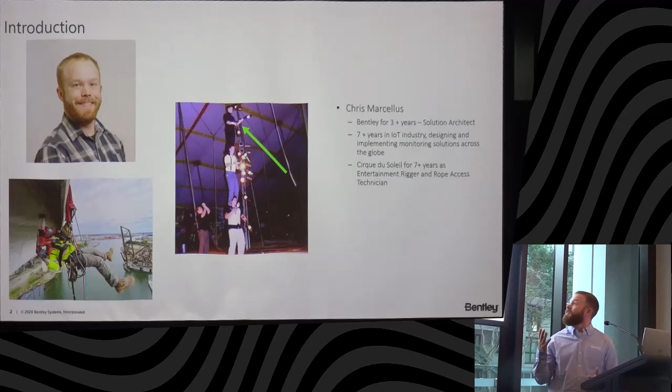So first slide is going to be my introduction slide. This is kind of my highlight slide to make me memorable.

I've been working with Bentley for about 3.5 years now. Previous to Bentley, I was with the monitoring group in the IoT realm, SenseMetrics, if anybody's familiar with them, and I transitioned to Bentley as part of that acquisition. So I've been a solution architect with Bentley for the past 3 years. Prior to that, I was an installation technician for a company called BDI.

I'm here, as you can tell by my very American accent, from Denver, Colorado. I've been here since Tuesday, flown in to present at this event. So I'm grateful to be here and for the opportunity to speak to everybody.

But I've been in the IoT monitoring industry, designing telemetry systems, doing rope access, and really a boots on the ground experience that's transitioned more into the software side of the equation since the Bentley acquisition. But with the benefit of having that hardware background and being able to consult our users in the industry.

And previous to that, how I wound up in this crazy world that I'm in, I worked at Cirque du Soleil for 7 years. I was an entertainment rigger at Cirque du Soleil and learned rope access, learned the ropes, no pun intended, and transitioned from a rope access technician at Cirque du Soleil to a rope access technician traveling the country and the world installing these sensor types. So hopefully that makes me somewhat memorable going forward as we leave here today.

So a few things I want to talk about. First is going to be iTwin IoT and the mining industry.

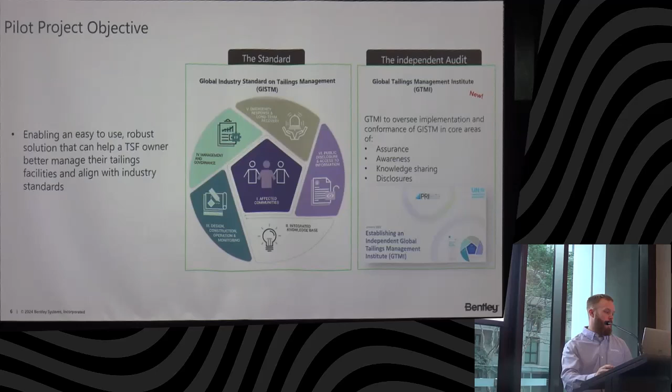So the pilot project objective: enabling an easy-to-use, robust solution that can help a TSF owner better manage their tailings facilities and align with the new industry standards, being able to be up to par with the industry standards as they evolve.

The why: structural integrity of tailings storage facilities are critical to community, safety, and environmental protection, so zero harm to humans is a very important thing. The challenge was how to go from a reactive workflow to a proactive workflow, using that plethora of data to visualize it in one single source of truth, and have access to reliable information when it's needed at the tip of your fingers, instead of relying on outdated, inefficient workflows that bog things down.

So the project approach: we instrumented 3 different control sections. We have some Worldsensing individuals here. We used 3 threads - the thread was a SenseMetrics hardware data logger that is now a Worldsensing hardware device, but it was used as a gateway in the network.

And then we used 14 strands of vibrating wires to tap into 38 piezometers to get pressure data, elevation to water, depth to water, and have live IoT data streaming in, as well as a digital twin from Leapfrog and some geotechnical analysis from GeoStudio. We were able to utilize the mobile app and bring in that data in real time, confirming in the field that a sensor was coming in as expected.

So parts of the workflow that weren't included: there were a few control sections that weren't instrumented, but there are plans to instrument them in the future. And we didn't include as part of the pilot InSAR, drone data, earthquake data, or geophysics.

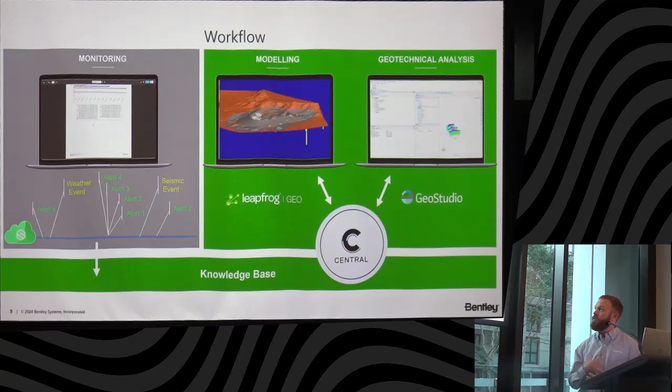So that's what I wanted to talk about with the pilot project. It was a successful pilot project, and I would say that there is stuff on the roadmap from that pilot to automate that workflow even more, which I look forward to seeing evolve in the future.

But the next few slides, I want to go over the iTwin IoT real-time monitoring and what our capabilities currently are in that realm. So IoT asset condition monitoring - you always want to start with the sensor data acquisition.

How do we get your sensor data in? Within Bentley, we are strictly on the software side, so we have to tap into different hardware manufacturers and their sensors, but we do have an IoT sensor agnostic approach. We want to be able to get all your data from your different hardware into one roof, so you're not relying on dozens of different logins for dozens of different sensors. We want to be able to be that one source of all your IoT monitoring data.

Once we've tapped into that sensor data acquisition, we can visualize and analyze using different modules within the platform. So we have dashboarding ability, data graphing, we can do anemometers and wind rose plots, XY plotting with your inclinometers and your slope stability. And then once we have all that information in, we work on the collaborating and the reporting and the alarming and the things that make sure you're notified as soon as you need to be, as soon as any thresholds that you've set have been breached.

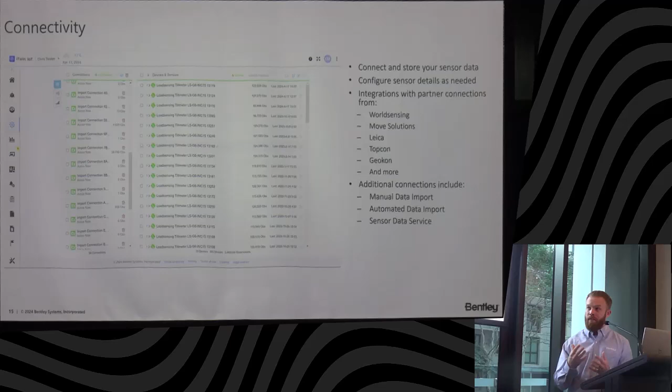Here's just an example of our connectivity module. This is going to be that repository of the sensor data that comes in. You have your observation counts, your last observation that came in. You can visualize alerted sensors directly on this platform. Every sensor will have a configuration page where you can add notes, calibration factors, installation photos, and latitude and longitude location to be able to visualize where the sensor is in real time within the different modules that we have.

Our dashboard module allows you to bring in your project data, your IoT sensor data, as well as visual data such as photos and alert summaries, different things like that into the platform.

So within every project, you can have customized roles to pick and choose who is able to do what. And then you can set any profile, be it a dashboard, an alert, a report, whatever it may be, as either private, restricted, or project-wide, to make sure that stakeholders are getting informed in time as needed. And maybe, especially with things like an alert threshold, maybe you want to make sure you're going to verify it before somebody else who might not be as involved in the project gets alerted and kind of rings a panic alarm. So we have different abilities to be able to customize individual profiles to that extent.

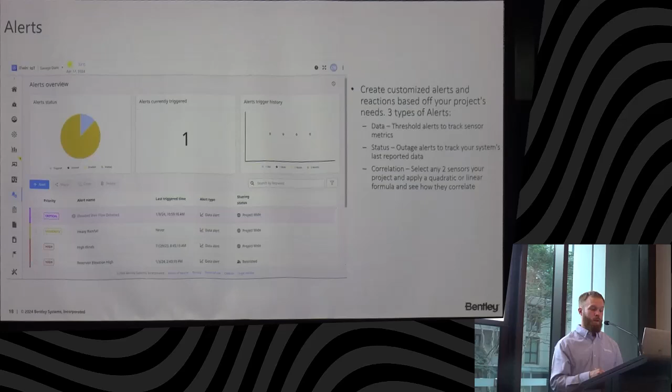So this is going to be an example of an alert that's currently in a triggered state. If I roll through, you can see a trigger history, what value triggered the alert and when it happened. You can also see a data graph display in comparison to when the sensor values compare to the alert threshold that you've set. And then we do have different priorities that you can set between low and critical, and the color scheme will change depending on the criticality that you set. And then we do have the ability to do alert trigger actions, utilizing that IoT functionality.

Maybe you have a solar system set up and you have a sensor that's in low power because it just doesn't have the demand to be on all the time. You can change that sensor connection power mode automatically in response to an alert trigger.

We can also change the sensor sampling rate to get more data coming in. We can take a photo in response to an alert trigger, toggle a relay device such as ringing a siren on site, and we can also generate a report automatically in response to an alert triggering.

We also have our issue resolution module. You can create an issue in response to an alert triggering, and what the issue resolution module does is allow you to take it a step further. Your alert triggers, and you can create a work order in response to it.

It will automatically populate the sensor data, the length of the sensor data, the values and the dates that trigger the sensor data, and you can assign a task to anybody on site in response to that alert triggering. It will be kept on the platform and can be exported to CSV so you can stay organized, keeping everything under one roof as much as we can.

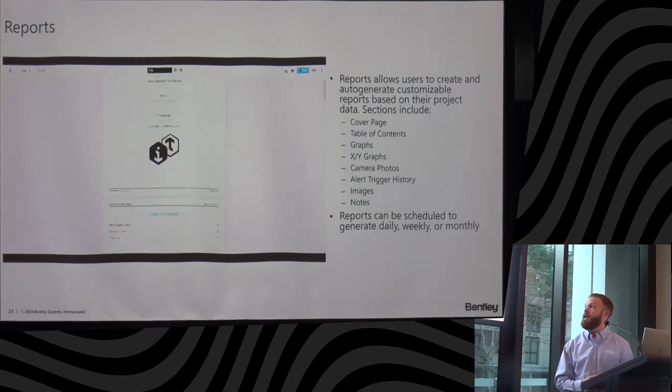We can also add tabular data to this view, alert summaries—use this to really keep track and keep everybody informed on site to what's happening.

And then last but not least, we do have our digital twin workflow. The digital twin module allows you to overview that sensor data. If I click onto the next slide, I'll go through about a minute and a half here.

That red icon is an example of a sensor that's in a triggered state. As I mentioned, each sensor is going to have that latitude, longitude, and elevation you can set. But if you don't have that surveyed ability, you can just snap the sensor into place directly within the module. Any sensor with a hyperlink already has a location, but you'll see with this piezometer we're able to just snap it directly where it exists, and now it's available to visualize within the module.

We can also do heat mapping by metric or by alert threshold. The heat mapping by metric allows you to choose any sensor on your project, any metric, and see how that heat map is displayed over time. We can also move the time slider, and as you scroll through it, the heat map will actually change depending on the sensor data coming in on that date.

So you can see how the structure is being impacted by things such as climate change, or maybe there was a big storm on a certain day that you're aware of, and you can visualize that way.

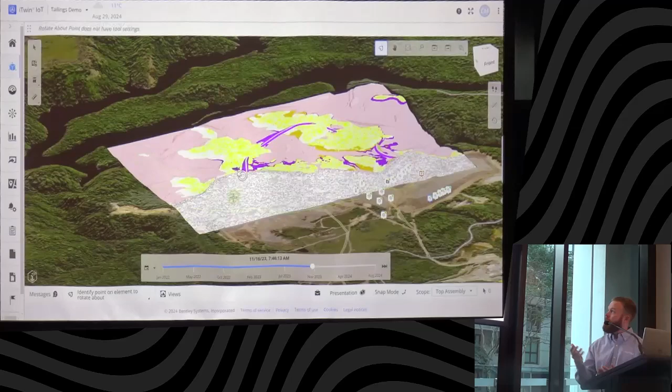We can also bring in the geological modeling over an IFC, view it in combination with that reality flight from the drone, with the sensor data, and we can also visualize the boreholes. One of the advantages of the BIM modeling and the boreholes is they come in as individual pieces. You can toggle off and on every borehole, and build different views as needed to really keep organized and make sure you're able to visualize the correct spots within the tailings to monitor over time.

Okay, some of you in the room may know about Sixense. For those of you who don't know us, I'll give a brief introduction. I'll then talk a bit about our instrumentation and monitoring solutions. We'll then look at a few different use cases, and then at the end I'll make some conclusions and recommendations.

Okay, so about Sixense Group. So, okay, the presentation on this screen is not changing, but this one is.

Sixense is offering services across 4 main business areas, from left to right: instrumentation and monitoring, this is the bulk of what we're doing here in Australia; digitisation and inspections; some geophysics and specialised engineering; and also digital solutions and software.

The common theme among these services is quality data. So our job is really to provide data that's quality controlled and actionable for our clients, whether they're constructors, mine operators, TSF operators, designers, builders, and so forth.

Globally, we've got about 20 different offices with headquarters in France, and locally that looks like this. Our headquarters are in Melbourne. We've got offices in Sydney, Adelaide, Brisbane with an asterisk because we're setting the Brisbane office up at the moment, and across the ditch in Auckland.

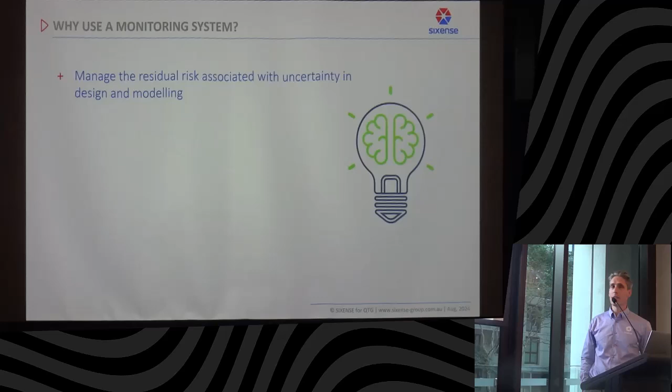This was alluded to before. When we design tailings dams or structures, we don't know everything, we make assumptions. We need to monitor to understand those uncertainties and also the residual risk in our structures.

It's also for early detection of a developing instability. Visual inspections, of course, are good. If we've got sensors deep in the ground, we can be alerted to things that are happening earlier.

It could also be for communication of an alarm exceedance. So, okay, we've got a developing situation, an alarm has been raised - do we have a structured process through the TARP or whatnot to efficiently get that message out to all the stakeholders? It can also be used to confirm the geotechnical characteristics are within the expected ranges.

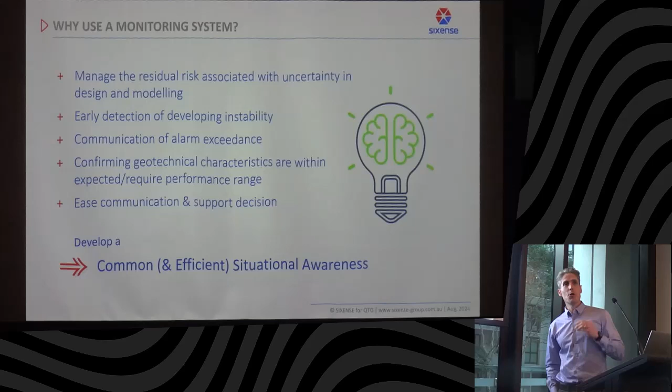And it can ease communication between different stakeholders and help support the decisions that they make. So at the end of the day, what we're looking to do here is develop a common and efficient situational awareness. All stakeholders should understand what's happening on their site, and it should be done efficiently.

Looking briefly at the situational awareness maturity model, which goes from low up to common and efficient. So low - this is a site where the data is inconsistent, we don't have all the data that we need, and the different stakeholders aren't communicating. So this is a worst case scenario.

Moving up to diverse, where we may have the data, but it's stored in different places, it's siloed, and different individuals have control of those different data types. Up to costly - okay, this is maybe where we're gathering all that data in one place, but our processes aren't optimised, and it's not efficient.

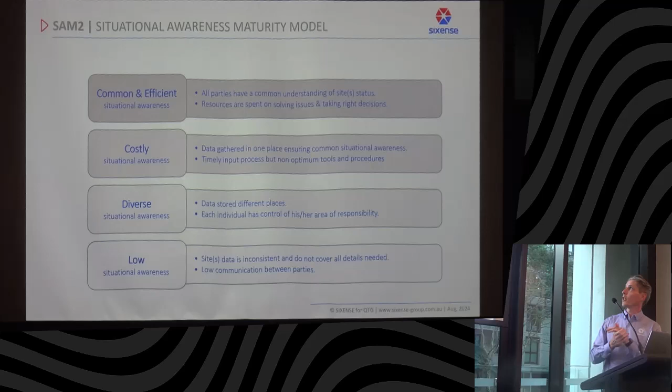And the top of the chain here, we've got the common and efficient, so all parties have a common understanding of the status on site in terms of monitoring, and resources and time are spent on solving issues, making decisions, not gathering the data. This is really the objective here. I'd say most sites are probably at diverse or costly. A few might be at common and efficient.

Okay, so how do we get there? Well, a good start, as was mentioned earlier, is to have an integrated monitoring solution where you're bringing all of that data into a single place. So whether that's your geotechnical sensors in ground, like inclinometers, extensometers, piezometers, above ground or deformation sensors, things like automated total stations or InSAR data, laser scanning, and environmental sensors - dust, noise, vibration, and so forth.

Integrating all of that data into a single place, a single point of truth, is very important. Another important thing is to have real-time data collection, which can improve efficiency.

Not so many years ago this would have been quite costly, but now it's probably costly not to do this. A lot of the sites are remote, it takes time to go around and collect sensors. It's really a no-brainer to implement an automated real-time data logging solution at your site. There's also, of course, not real-time but remote, satellite-based technologies such as InSAR, and then we've got GPS and so forth.

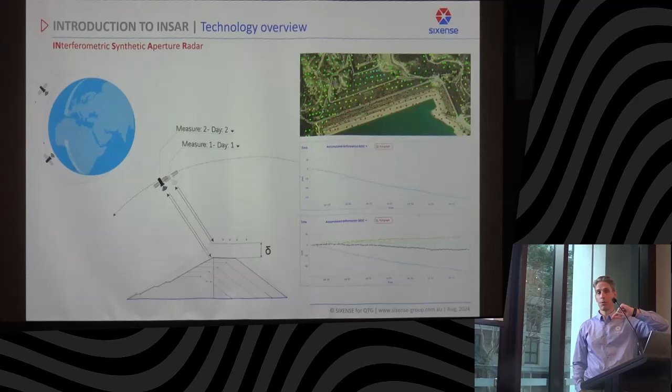Quick introduction to InSAR. I'm sure most of you are familiar with the process, but basically satellites orbiting at about 800 kilometres above the Earth's surface from north to south are constantly scanning the ground surface, and between subsequent visits you measure the phase shift and then derive the displacement. Typical medium resolution satellites shown at the top there, and we can see the displacement along that dam crest. That's about 60 mils in three years. So every time the satellite passes, you get a new point on your time series curve.

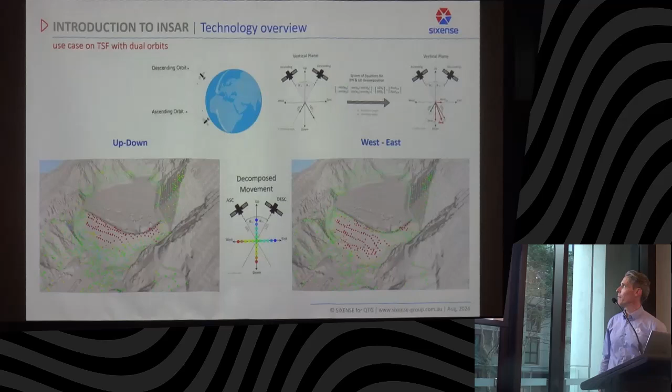Now, InSAR is mostly used in single orbit, which is line of sight displacement, but if you're interested to use InSAR for horizontal displacement and true vertical, then you need to use dual orbits. So one satellite looks this way, the other satellite looks this way, and then you can decompose the vertical and horizontal movement. An example here on a dam, whereby up-down we're getting settlement, but also east-west it's moving out, so it's sliding down. The important thing to note with InSAR, because of the orbit of the satellites, is that we can only measure east-west horizontal movement, we can't measure north-south. So the orientation of your structure is important before you decide whether to use InSAR in dual orbit.

Software, of course, is important, and I think we'll see a few softwares today. Ours is called Beyond Monitoring, and a few key features of this for raising common, efficient situational awareness include data integration, making sure you've got a platform that can integrate any type of sensor data. It should also be able to correlate data, do calculations, and give you data insights. GIS-based platforms are a good start, where you can turn layers on and off and comprehend a wide range of sensors and a lot of data easily.

Alarm management, as talked about earlier, is key. Also integrated reporting and journals, so you can make comments on your sensors and explain what's happening. Visual inspection management is also a nice bonus to have, since we know visual inspections are an important part of monitoring. And having a software provider that is certified for data security is also becoming increasingly important, so make sure your vendor has the appropriate certifications in terms of data security.

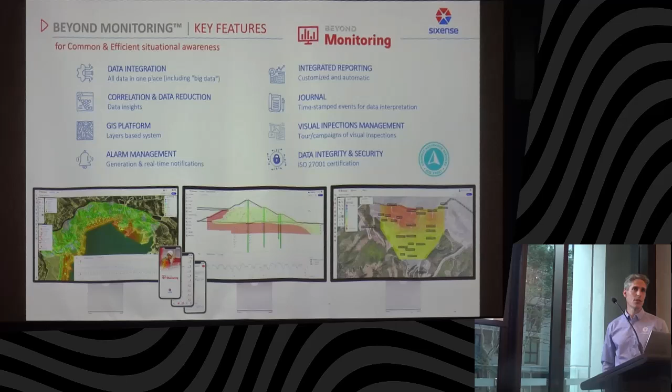We'll now look at a few use cases. I'll look at a small site, a large site, a complex site, and touch briefly on a multi-site. So this is a small TSF site, but it's state-of-the-art.

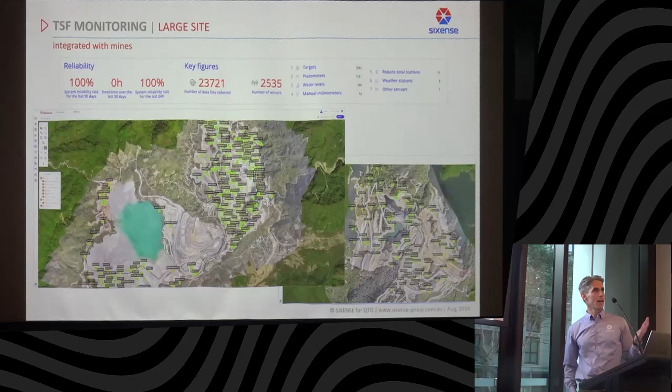Moving up to a large site, this site has about 2,500 sensors. It's 2 large TSFs adjacent to some open pit mines. There's 11 robotic total stations with about 1,300 monitoring prisms and 1,100 piezometers, some water levels, weather stations, and so forth. Having a system that is capable of integrating this volume of sensors and data is also important.

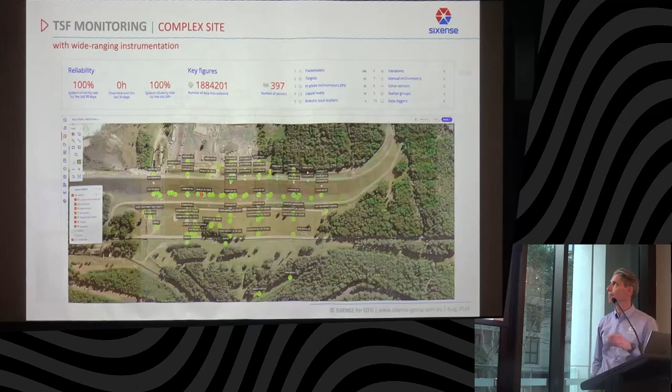And this site's a more complex site. It's got fewer sensors, about 400, but there are a lot of different types of sensors on this site. The reason being that this tailings dam is also being remediated and upgraded, so additional types of sensors are required here. There's a large network of piezometers installed, all with real-time data collection that we can follow by the hour.

There's also automated total stations, which we can control directly from the software. So there's no need to use Trimble or Leica software if you don't want it. We can drive those total stations directly from our software.

There's also other things. Of course, we're looking at water flow, but we're also looking at noise, vibration, and dust, which are not always critical for TSF. But in this case, there were communities close by to this site, so we needed to monitor those parameters during the construction.

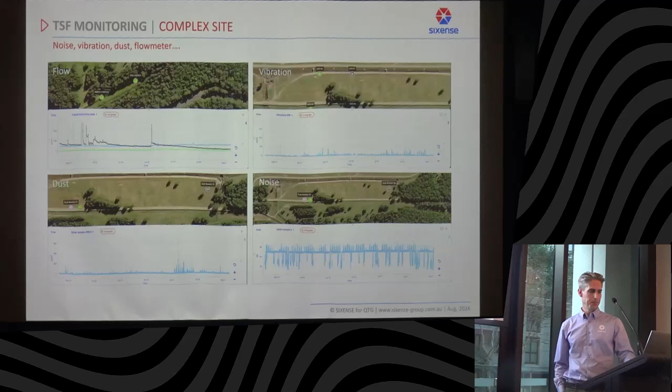And then, of course, if we're looking at organisations with multiple different sites or mines, having a solution that's capable of integrating different sites into one platform is also a useful feature.

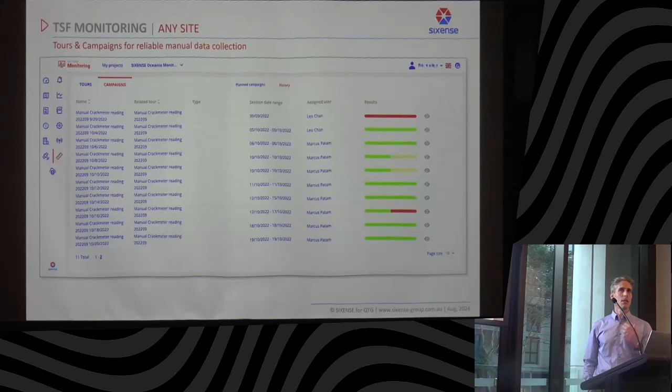A couple of additional features which can be useful at any site would be tours and campaigns. These are used to manage manual sensor data collection. At many sites we have automatic data collection, but there'll always be sensors that need to be collected manually by visiting and reading those sensors.

So if we set up a tour, we say sensor A, B, C, D, E need to be collected every second Tuesday. We can then push those out via campaigns to different users, and on the phone they'll receive a map of where they need to go, and then they'll be able to upload their measurements.

When they upload their measurements, they'll be able to see a history of the measurements to make sure they're not putting in the wrong measurement. Of course, you can then review those on screen.

Having a software that also has a toolbox to be able to do manipulations of the data is important. Things like error corrections, offsets, or automatic error corrections are important.

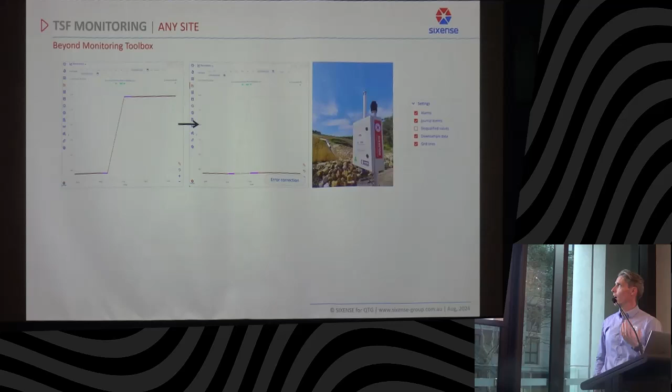Also, having those features to be able to track your alarm notifications or journal notes directly on the sensors and interrogate those through the graphs is also important. And also being able to disqualify data. We never delete data, but disqualifying that data is sometimes important.

Also, having a mobile application for alarm management can be a good idea. Of course, alarms are normally pushed out to emails and sometimes text messages, but by using a dedicated mobile app, you can get a lot more information from your alarm. Via a push notification, you can receive the alarm, interrogate the sensor data, look at how it's performing, and acknowledge that alarm if you want as well.

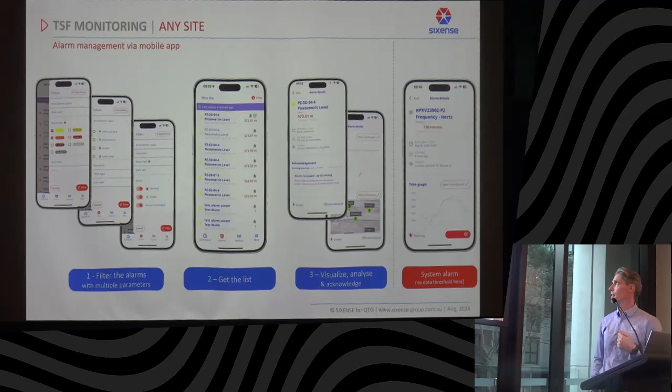And then also system alarms, for example, for no data. So if we aren't receiving data from a given sensor, having a no data threshold alarm is important.

Visual surveillance inspections are also a great thing to be able to incorporate into your monitoring software. We have a software called Beyond Patrol, which is used for this, whereby you can create a visual inspection plan with different checkpoints and also what you need to do at each checkpoint, whether that's take photos, make notes, check different things. We can then schedule those visual inspections and push them out to the various users.

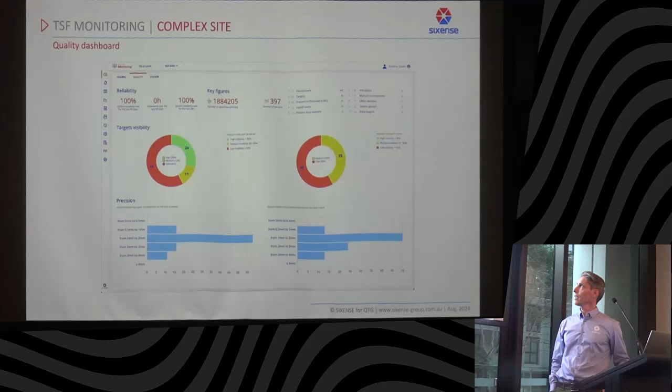Of course, benefits of this might be standardizing your process, and also having that inspection data alongside your monitoring data in the same system can be quite powerful. And also having dashboards which can quickly draw your attention to important aspects of your site is also important.

So, conclusions and recommendations. These are conclusions to create this common and efficient situational awareness that I mentioned. Firstly, one size doesn't fit all.

So as a TSF operator or engineer, when you're specifying your monitoring, carefully write it, don't copy paste. We see many specifications copied and pasted using old technology, so think about your monitoring specifications and consider the wide range of instrumentation that is available.

Consult your vendors and your partners. There's often new solutions and new technologies on the market that can bring much more efficiency to your site. Carefully select the monitoring platform, and you can hear a lot about this today from us, different vendors. But of course, it needs to be holistic. We're looking to de-silo that data, get all of that data into one platform. Make sure you select the software that is capable to do that.

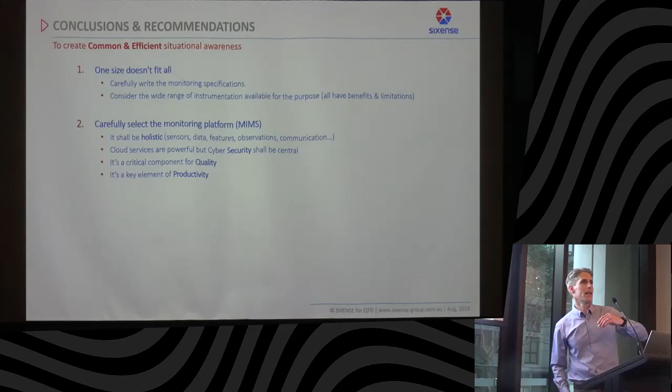Nowadays, with cloud services, make sure your vendor has the appropriate cybersecurity certifications. And it can also be important for quality and productivity. Now, of course, monitoring software is not going to help you pull out more ore out of the ground, but it can alert you to developing situations, developing instabilities, which you can plan around, which of course can help productivity.

Don't underestimate data management. So we will always provide a data manager with a project, and that data manager's role is to ensure that the data on the platform is quality controlled, that the client has data that they can trust. So don't underestimate this.

Installing a monitoring system is not set and forget. You need to follow the data and make sure the data is correctly reported.

And at the end of the day, what we're looking for is data availability and data quality. These are everything, which means that when you need the data, it's there, it's available, it's on the platform, and that when you look at it, the quality can be relied on. Okay, so availability and quality are key.

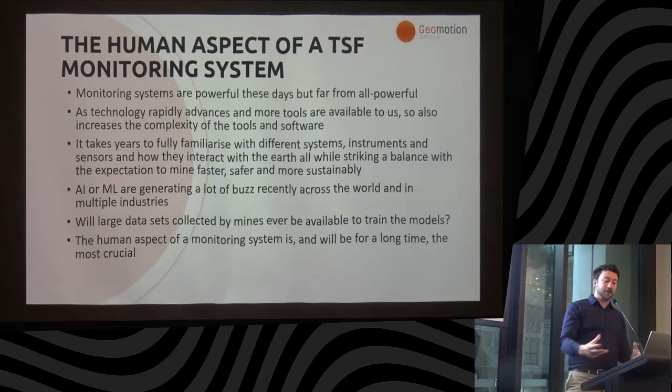But these are all fed off huge sets of data, and will these large data sets collected by the mines and things like that ever be available to train these models? So they could be inaccurate for a very, very long time. So the human aspect, it seems, of a monitoring system will be, for a long time, the most crucial aspect.

So the general flow of data on a project pretty much looks like this. You've got a sensor that's sensing some sort of physical change in the Earth. That gets read by a data logger that converts it into ones and zeros, and then radio and whatnot, goes onto a data management platform, of which you've seen a couple. But at the end of the day, there's analysis and decision making that needs to be made on that data. So for your convenience, I've highlighted in orange every single step of the way that requires some sort of human input. So pretty much everything.

So the human aspect of sensors. You know, there's quite a lot going on here. These are actually when they actually go in the ground and what they're monitoring. Are they being installed to manufacturer instruction? Grout properties followed, methodology followed. Are the installation records detailed and accurate? Have you verified the installation? Are they installed safely at the end of the day? Is there any post-installation support available to you from the manufacturers or from the commissioners?

Innovative solutions able to be built to solve issues on site. For example, if you're in the middle of nowhere, can you get satellite coverage if you don't have 4G or 3G? Is the commissioner focused on data quality? Things like sanity checks are really, really helpful. You know, if you install a piezometer 5 meters deep and it's reporting, say, 10 meters equivalent of water pressure, perhaps something is wrong and you might need to replace it or have another look.

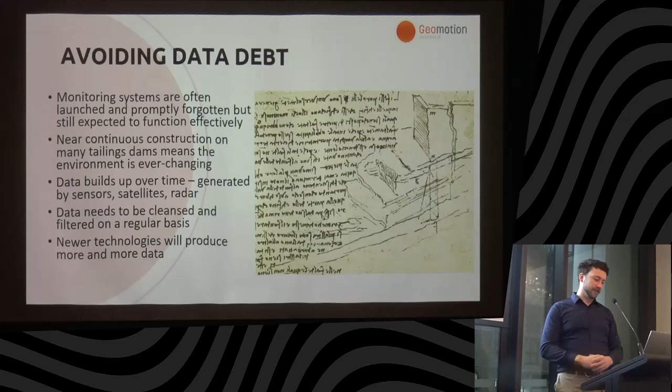And as we go on, newer technologies are producing more and more data all the time, as you'll see. So fiber optics - they're essentially the same cables that feed your internet at home, so you can download your dog and cat videos.

The same principle can basically be manipulated for geotechnical monitoring, monitoring the change in the cross-section of that fiber optic to get strain and temperature. So the ability to get this distributed, dynamic, accurate, high spatial resolution data is absolutely amazing, wonderful, very powerful, but some caution needs to be applied at the end of the day.

Systems are already complex. You've got satellites and complex instruments all the time, and there's always complex ground conditions and interactions with different soils. This system in particular would generate a significant quantity of data, and there needs to be systems in place to filter, process, and make that data actually usable. Hardware, software, commissioning, maintenance, technical support, training, data management all need to be considered when implementing a brand new system such as this. However, if these techniques are all mastered, technology such as this offers fantastic benefits for TSF monitoring.

So the champion - they're not exactly Superman, but I'd like to think they're pretty close. Quite often when monitoring drops in efficacy, it's because it's quite simply forgotten about. People get busy, it falls to the bottom of the list. It happens all the time.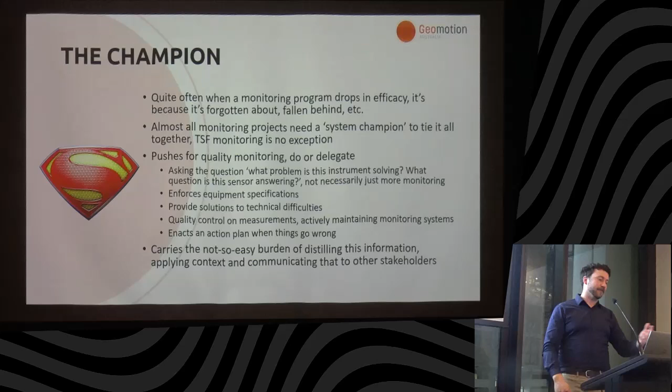They need to be enforcing equipment specifications, making sure all instruments are working to specification. They need to be providing solutions to technical difficulties on site, helping out here and there. Enacting quality control on measurements, and actively maintaining the monitoring systems - quite often that's delegated. And they're also usually the ones that enact the action plan when something goes wrong.

So to tie it all together, they quite often carry the not-so-easy burden of distilling all this information from different sources, applying context to it from ground conditions and site works, and then communicating that to a whole bunch of different stakeholders, some technical, some non-technical. So there is an inherent challenge in communicating this data, usually for the champions.

Modern monitoring systems produce huge amounts of data. There's a complex interaction with geology, weather, works progress, site works, everything, and you don't really get to have any control on that, unfortunately. There are labour shortages, and geotechnical engineering means there's a skill shortage in people experienced in looking at this data. And in some cases, this data is very difficult to effectively visualise.

Subsurface movements - some would be pretty much imperceptible or invisible to the naked eye, especially when dealing with movement over time. So this one over here, there's no more than 30 mil of movement - is that big? But it means big in a geotechnical engineering context, while being almost invisible to the naked eye.

ISO standards are still being developed. There's only a few instruments covered at the moment, and new instruments are being built faster than we can build standards to control them. There's no technical reference really for analysing or interpreting the data from these instruments, or recognising errors when things go wrong. There's no real rock-solid single reference for it, so it's quite difficult to realise, and it's all essentially based on experience.

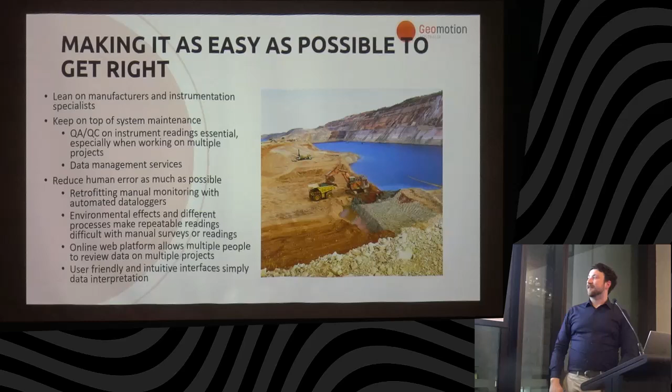Environmental effects and different processes make repeatable readings for manual data collection really, really difficult. A manual survey might be different at the start of the day versus in the middle of the day due to environmental effects - temperature and stuff affects every single sensor.

An online platform will allow multiple people to review multiple data from multiple projects all at the same time. Makes it much, much easier, especially these days when people are working on 3-4 different projects at a time, and having the same platform control all of it is a big help. User-friendly, intuitive interfaces really make that much easier. The last thing you want is to go through a brand new system, learn how that works, then switch to a different system. Just make it as easy as possible for yourself.

So, basic conclusions. Modern monitoring technology is impressive, but it's effectively useless without a human at the wheel - your car doesn't drive without you pressing the pedal. I recommend trying not to get bogged down in having the most modern and complex systems if you don't have the adequate experience in processes to analyze it. It might just be overwhelming. They do, however, hold a lot of potential.

If you're able to fully extract all the value out of your system, then go for it - it's fantastic. We need more champions in the industry with experience in monitoring, pushing for better and higher quality monitoring programs. At the end of the day, the goal is to prevent harm to people and the environment. Monitoring is an important tool in the arsenal for this, and it has and will continue to save lives as we go on. So it's obviously very important.

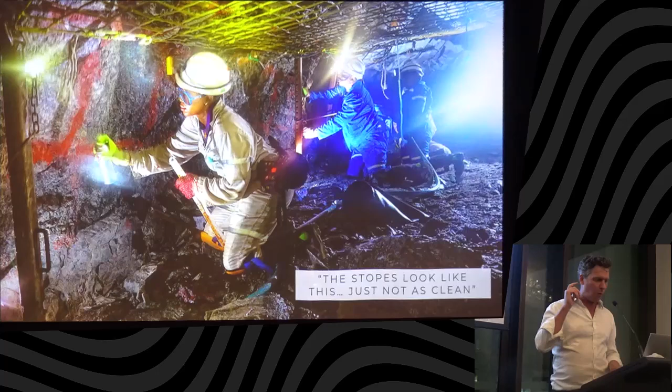But anyway, that's how you get underground. I was like, okay, this is sounding a bit hard. Then when you get off that, you have to walk 1-2 kilometres to your work area, and then you crawl in. If you're having a good stope, you're at about 1.2 to 1.5 metres high. And he says, this is real mining, Lachlan.

When I went there, I also had the pleasure of—the guys love it when a visitor comes because they're like, sweet, someone else can do my job for 20 minutes. They bring you in and you have to sit on this air leg and give it a try yourself, which is pretty intimidating. And you can imagine getting ground support in there is difficult.

So the most common form of ground support are the props at the front, you can see against the face. Then you have the wood packs, which are over here behind you. And further behind that is a pillar, which is often concrete, often with wood packs behind that again.

So I was like, okay, well we've just started this business, I got no money, so keep talking to me. And he says, I need you to build a slope stability radar for there. I was like, that bit's alright, I can do that. And he says, yes, but you can't have any moving parts. I was like, oh okay.

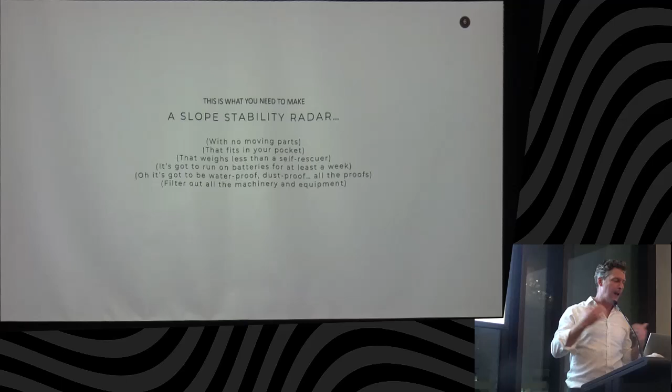I was like, oh, have you seen how big they are, Leslie? You need about 2 ton to drive these things around. And then he says, also, it's got to run on batteries for at least a week, longer if you can. I was like, well, we do about 8 hours at the moment on surface before the engine kicks in. And then he says, it's got to be waterproof, dustproof, drop-proof, all the proofs. I was like, oh, this is hard.

And then, but you also got to filter out the people and the machinery and just look at the rock. He says, for some reason, and the last bit is, it's going to only cost $20,000. He says, I've talked to everyone and no one wants to do this. I was like, oh, I wonder why. But he says, I'm guessing that you do because you've just started a business and you need my support. And I was like, oh, I am the man for you.

And so we jumped in and said, okay, we're going to make a nano radar, we're going to call it. So the first thing to do was to get over to South Africa, but it was during the travel bans in COVID and we couldn't go there. So we thought, okay, well what are we going to do next?

So we sent a laser scanner underground and we scanned a stope and we got that back and took the measurements. And I was lamenting at a barbecue over a few too many beers with a chap, and it turned out he is the set designer for Mad Max. He's also the guy who built the Brisbane sign here, and he just does random weird projects.

And I told him about this. I said, can we build an artificial stope here in Brisbane? So that's what we did. First thing he did is he went over in the dead of night to Kangaroo Point and poured silicone over the rocks and peeled off the fast-setting silicone to make a mould of rocks. And you can see we then cast them with expandable foam.

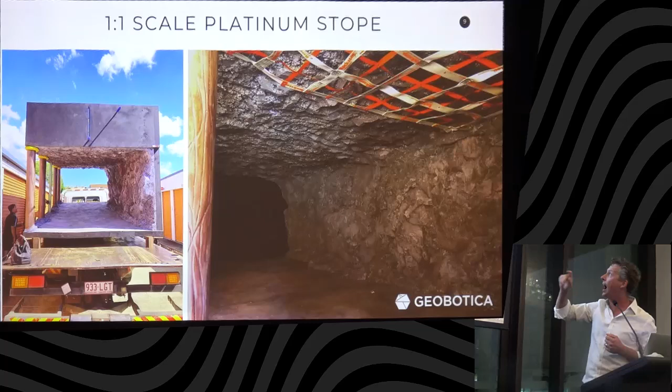on the roof of this artificial mine. That's it on the right-hand side, what it kind of looks like on the inside. That's me inside Brisbane's first ever platinum stope.

And every two weeks we'd all have to pull on our PPE and go in for the Teams meeting with Anglo American, and we would go and talk about the progress and the design and how we're going to interact with this thing to make it work underground.

So that's a screenshot of me looking very interested in the back there. But yeah, it was a terrific way to do those regular meetings.

And then this is after quite a long time actually, about two years of R&D. This is the final outcome of what we built. So this is NanoRadar, all of those things that we wanted to talk about.

The thing you can see there is a folding tripod, and I will get to tailings, you just got to believe me on that. But what you do is, as you walk around, it knows that you're moving when you're underground. You flick open the tripod a bit like a flick knife, I guess, and put it down.

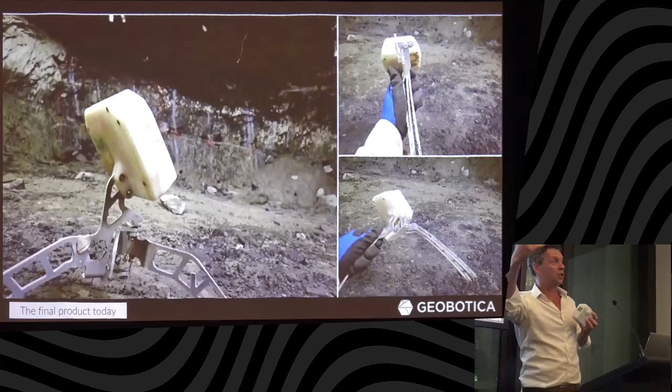It then will detect that it's stable and it'll start a new data set. In this top corner there is a 90 decibel siren that we had to pick the frequency of the human voice, the frequency of machines, and pick one in between so it will penetrate through.

Also, the reason it's this odd colour is that when an alarm triggers in the zone, the whole thing illuminates like a lantern. And yeah, it measures sub-millimetre displacement, just like a traditional slope stability radar,

but it has a whole bunch of antennas under this strange little dome here, and it takes like a radar photograph, and it does that every two minutes and can measure side to side.

So that electronically steers the beam. It scans every two minutes, it goes out to 80 metres range, measures sub-millimetre change. You can see the scan area is about 120 degrees, so we could scan this whole room.

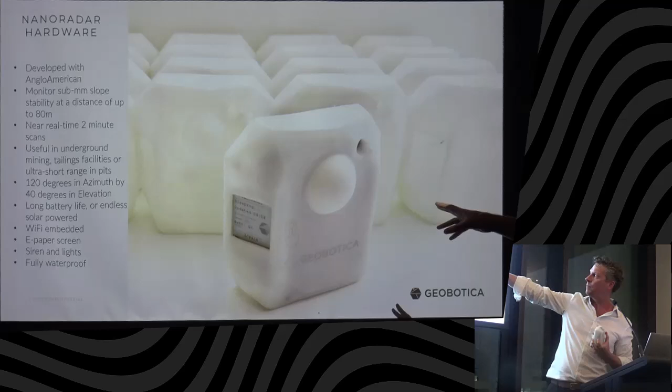Inside it is a Wi-Fi connection as well, and that can then connect where you can view the data remotely. The little screen on the side is the same technology as a Kindle, so it's very low power.

So we set the screen and then we turn off the power, and that way the batteries in this can run 24/7 for 9 days when you're underground, which is long enough to meet one of his difficult specs.

And then the next thing, inevitably, that the question was, well, can we use it open cut in pits? And well, the answer is yes, we can. This is our software, and I'll take you through that in a minute. And then, well, what about tailings embankments? And the answer for that one is yes as well.

So let's just talk about this. We've very kindly been given permission by this customer to talk about this case study under the condition of anonymity. So let's just enjoy it. All I can say is that it is a Queensland facility. Okay, so let's have a look at it.

So what is the issue? The issue here is this is our software, a photogrammetry model of the embankment, the two walls that we had to monitor, and inevitably tailings are so often right up against the boundary of the mine, so of your lease area.

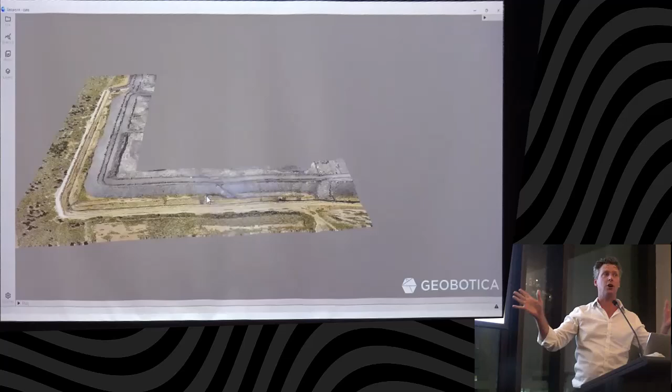So putting a traditional radar, we just couldn't get one far enough back to monitor the whole area. So we needed to deploy many radars, traditional or otherwise, all the way along it. And of course the cost of deploying, say, 10 traditional radars is probably a lot more than needed.

The flip of it was, could we maybe put in some GNSS sensors, was an alternative option, but really when you have a system that's come from underground at this low cost, it could be really attractive to put quite a lot of them. So next we've developed this little box.

It's just, you just pick it up and drop it off, and then it starts monitoring. It connects to a Wi-Fi network. There was no phone signal out there, so we've set up a Starlink, the SpaceX Elon Musk connection, and we have 13 radars along this facility.

So it's covering about 1.5 kilometres with real-time data. So the next thing is, what's the TARP for monitoring this particular case study?

So we have two triggers. The first trigger is 25 millimetres a day, and the second is a total displacement of 250 millimetres since monitoring began. If we recall, a GNSS alternative gives, depending on the manufacturer, maybe 10-20 millimetres of noise between readings, which is why radar may be a good option in this case.

So let's check out the data for this facility. We're highlighting 13 of these, and we'll deep dive into one. We've set the chart to show the velocity TARP. If I showed it at 250 millimetres of cumulative deformation, you wouldn't be able to see it - it would just be a very flat line. So you can see that's 4 months of monitoring data, with sub-millimetre precision in real time.

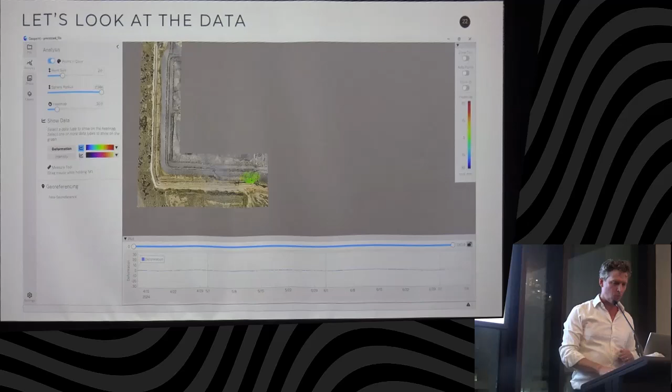So you can action that. If we check that out, this is the movement at the toe. If we zoom in a little more, and expand that chart out, you can see the level of precision over that period of time.

And there is a seasonal, not only just a diurnal change that we have to manage - there's a seasonal change you can start to see come through the data as well. But again, very small sub-millimetre changes.

So this is the largest amount of settlement in that area. It had just recently been dozed, and there's been little pockets of settlement on the surface as the material self-compacts, which has been interesting to see. But essentially, stability there was established - at least deformation stability at the moment has certainly been established.

Now this is not in colour, just to help anonymity here. Just giving it away. But we won't tell it. Okay, yes, fair enough, okay.

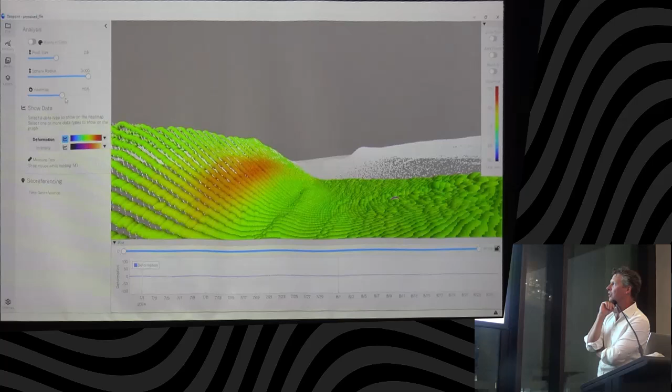So if we zoom in here to our software and have a look, you can see if I click areas where they're stable, there's very little deformation. I could just move this slider to change the heat map, and you can see that's currently set on 19 millimetres over a 2-month period.

If we bring that up, you can see at periods of rain this rapid acceleration - about 2 millimetres here, a very small area that let go, and then a regressive movement as it slowed down with continued deformation. As there was more rain, another rain event had a few other small areas release, then another regressive area before we get progressive again.

And as we click around, we can add more points to that and see there are some areas here that did not have the same timing of acceleration and deceleration throughout the slope. You could come and grab an area to look at all of those, or just look at an average of those displacements in that one zone if you wanted.

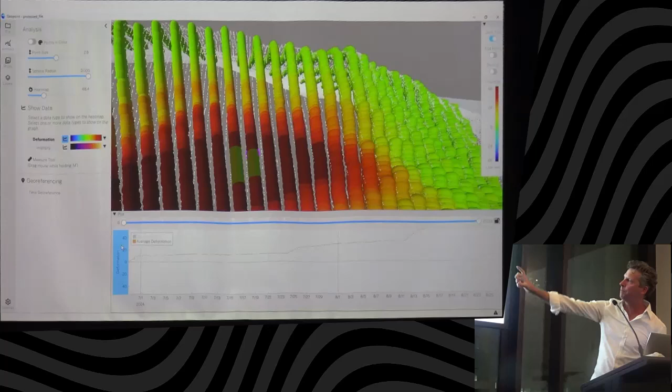And the colour palette at the top also matches - or back, also matches. If you want to view it the other way, some vendors like to show it upside down; we just show it both ways. You can flick between negative or positive deformation, however you want to visualize it, whatever you're used to with other sensors. So that's some of the features of the system.

Now what we can do is zoom out, and I believe we're just going to - what are we going to do now? We're going to move it around, click some other points. I'm supposed to be talking about something else.

There's also another feature called layers, which really helps with reporting, where you can group different points together and quickly report on those rather than on individual areas.

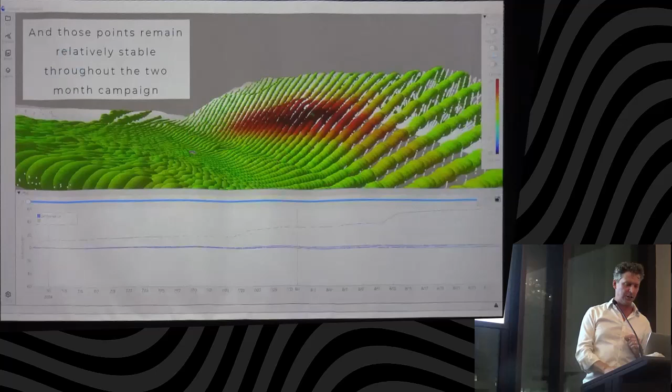Which is pretty cool. And if we compare that with adjacent points at that same period of time, sub-millimeter there, just below it on the slope, whereas the area that's moving is still moving by several millimeters. And those same points that I selected, if we go for the full 2-month period, you can see they've remained stable the whole time as opposed to the collapse itself, which is great.

Now, we're just going to end with something a little bit more fun. So, I love working with Brazilian people. They're just terrific people, I'm sure you've all felt the same thing, there's a different energy about them. And if I thought the South Africans gave me a hard challenge about underground, then I just hadn't spoken to enough Brazilians, because they said, we've got a problem, I'll just call it linear infrastructure, where we have a lot of slopes that we need to manage.

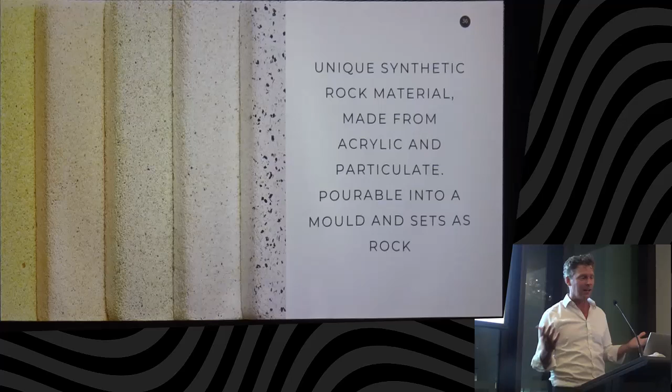We found this material that these guys in Ireland make. Now this is an acrylic, so it's plastic, and they use it generally for jewellery and sculptures, but it's got little bits of rock particulate in it, and you can pour it into that mould and then it will set and look like a rock.

Yeah, so that's been a really fun thing to do.

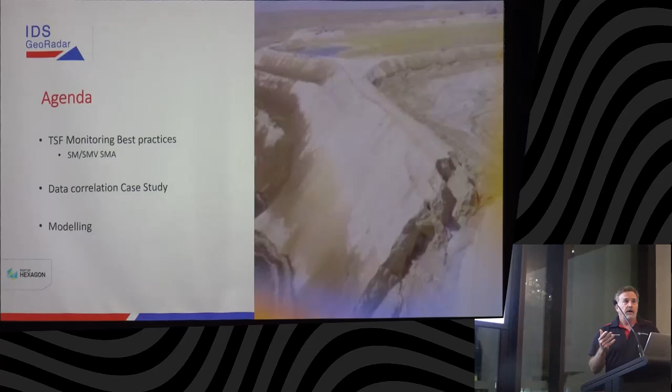So some best practices. I'm not just going to talk about normal radars, I'm going to concentrate on what we call SM, SMV and SMA, which stands for slow movement analysis. I'm going to explain how we go from normal interferometric radar processing to what we call slow movement analysis. That has benefits for tailings dams, because we may not necessarily want to see what's happening in real time. We may want to see really, really slow trending displacements that occur sometimes over years. So that's what we'll talk about in a little bit of detail later.

We'll have a look at a few case studies, but specifically I want to talk about data correlation, and how we can correlate radar data with PRISM data and INSAR data and GNSS data and all that sort of stuff. So we'll just, not in any detail, but just have a look at a few examples. And then right at the end, I'll very quickly talk about how we have agreements with other third-party companies, Rocscience, for example. So we have the ability there to use the data from both software packages to check if your modelling's right, things like that.

Okay, so that's just basically what we'll talk about. I'll try not to bog down too much. I'll put a couple of slides here at the start that I'm not going to go through in any detail because all you guys are TSF professionals, but just some basic points.

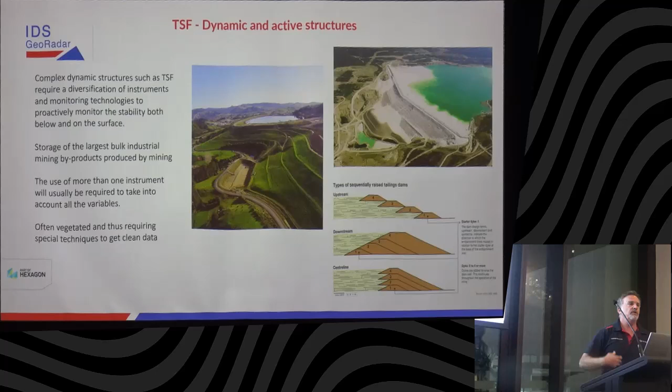Dynamic, active structures. I think everyone's spoken about this so far. In my opinion, if you want to actively monitor a tailings dam, you want to try and use as many different technologies as you can. There's lots of technologies out there that produce really good data, countless technologies that can be used for monitoring tailings dams, but when you have several of these technologies all together on the one platform, it gives the data more trust. If you're seeing the same data from 2 or 3 different instruments, then chances are it's correct.

And one of the big things too with TSF structures, they're often vegetated. Vegetation brings in big problems for any synthetic aperture radar technology. Any kind of interferometric radar, as a basic assumption, needs a coherent signal, a coherent surface. It's not going to work without a coherent surface. And obviously, if it's vegetated, we need to look at other techniques to try and remove that interference. Yeah, you guys know, I'm not going to worry about any of that stuff there.

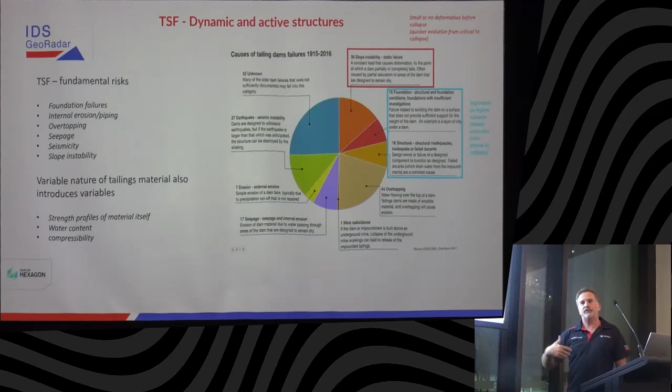Fundamental risks. Once again, you guys are all over this, know more about it than me. All the different kinds of risks there, failure types. Not only that, but a tailings dam is different to a normal open cut wall, for example, because it's full of material. And the material that's in the tailings dam, water content, compressibility, strength profiles, etc., all add to the monitoring challenges that we're going to get.

I've got this data here from that Chambers 2017. You can have a look at that later if you want when you go through the slides, but there's probably more up-to-date information than that available now, but that's just something I'll put there.

Okay, we've got INSAR people in the room. We've got Geobotica people in the room. We've got all kinds of people in the room that sell and promote their own monitoring technologies and strategies, which is cool.

Connected ecosystem of monitoring sensors, in my humble opinion, is, especially when you get to more bigger, complex TSF structures, that's what we all need to be aiming for, to get a complete picture of what's going on with our facility. So we've got our normal ground-based SAR, like GB-SAR over there on the left, radar data, total stations, obviously INSAR, there's VWPs, there's tilts, there's all kinds of different instruments. Bringing everything together on the one platform.

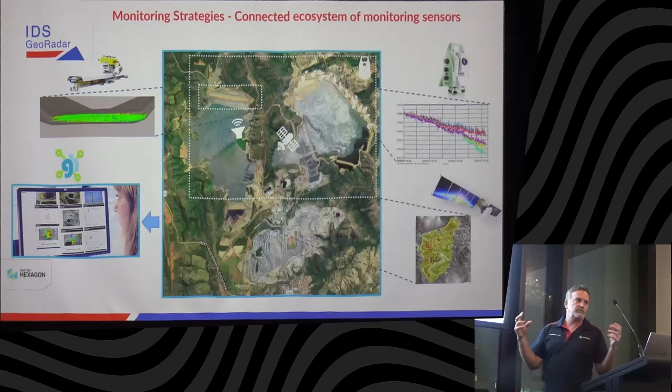And once again, we've seen various examples here today already of different products around the place. There's lots of them. Ours is called Hexagon Geomonitoring Hub, but it's very similar to Navstar and it's very similar to many of these products. It's there to try and bring all these data sets into the one software package so you can visualize everything at once.

So, a connected ecosystem of monitoring sensors. Let's get everything together on one platform for the best monitoring. But it's not just as simple as that.

What technology you go for, and how many technologies, is dependent on the risk assessment, the risk profile, or the risk aversion of the company or organisation you happen to work for. We can go from very low risk down one end.

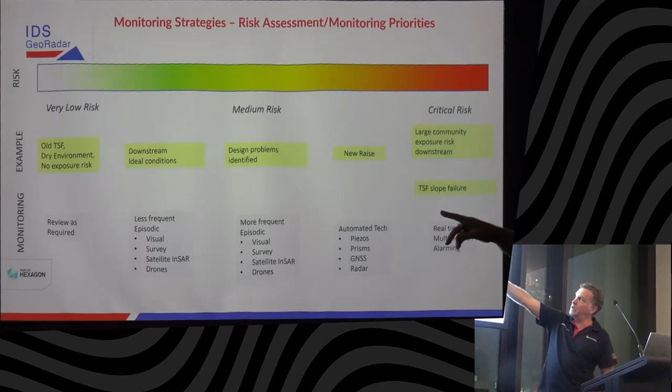It might be an old TSF, for example, that's dry, doesn't rain much. There's not much exposure - if it failed, there's no real exposure to people or anything like that. In that sort of situation, you can just review it as required.

And of course we go from the very low risk all the way through medium risk up to critical risk at this end. This is what I was mentioning before, where we want as many sensors as possible on the one platform.

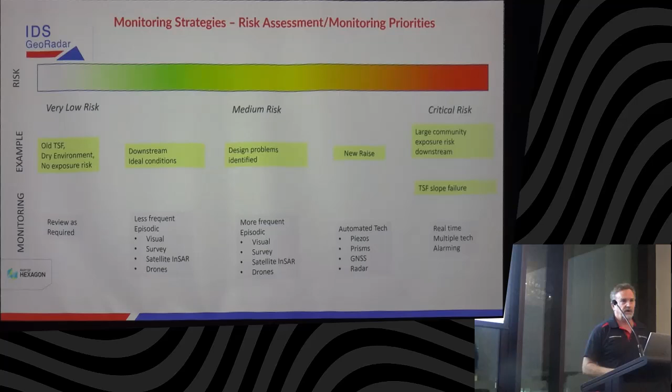With critical risk, there's a big exposure - people could get hurt or injured, we could get a slope failure, that kind of thing. We really want real-time monitoring, multiple technologies, and the ability to set alarms and things like that. So that's what, as geotech professionals, we need to look at when thinking about what monitoring technologies to implement.

I'm going to try not to make it salesy, because I don't really do salesy stuff, I like the technical side. At IDS we have our software called Guardian - some of you have probably seen it, some maybe haven't - but I'm not going to talk about Guardian specifically. I'm going to talk about the SM and SMV algorithms: slow movement and slow movement vegetated.

They're specifically for detecting extremely slow movements - not millimetres per day or anything like that, more like millimetres per month. So really, really slow, deep-seated, long-term linear trend displacements - that is what you may need to understand.

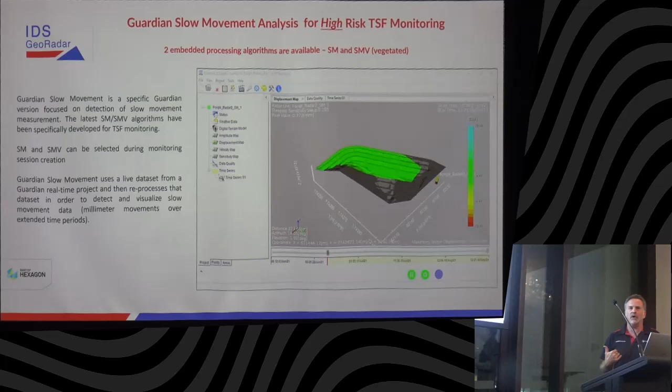A lot of people fail to understand that they really should be running a slow movement campaign as a first-up monitoring strategy. You can see what's moving that you may not already have known about, and when you see that, you can then concentrate your monitoring on those particular areas.

It also runs - it's just software, a different algorithm - but Guardian slow movement actually runs concurrently with real-time Guardian processing. So you can have the radar scanning away, collecting real-time data, and still alarm and do all that for your real-time movements as normal, but also run a slow movement project on the side as well. I'll explain how it all works.

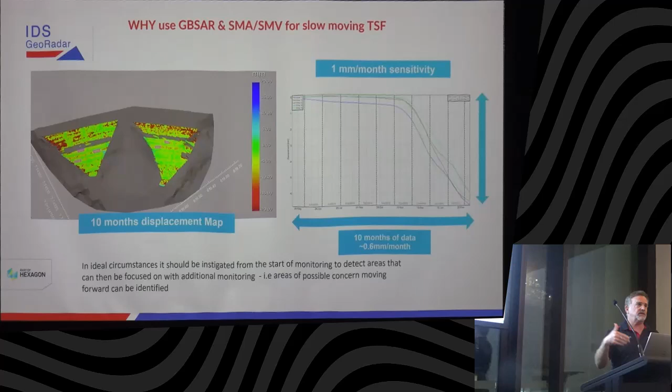So why use GBSAR - ground-based synthetic aperture radar. InSAR is also a synthetic aperture radar, but ours is obviously on the ground. They use very similar interferometric technology - they measure phase change, and from that phase change they infer displacement.

We'll see there, that's a data set - that's actually a vegetated TSF slope, 10 months worth of data. We can see the results over here, so it's nice clean data. When things start to move, there's nice linear trending. We can see this is just a plot, so something else has happened here and the displacement trend has changed, but we're able to record really, really low rates of deformation - this particular data set is approximately 0.6 of a millimetre per month.

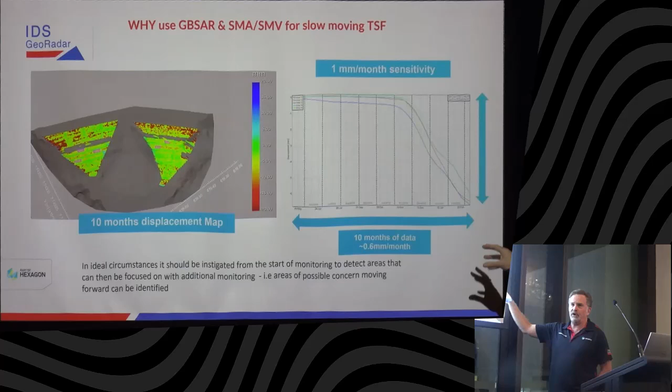It's not post-processed data, it's not just something we make up, it's actually real data - I'll show you how it works in a minute. There's other technologies around that can measure really slow rates of displacement, InSAR being one of them, but I don't know if InSAR can get down to a similar rate with as clean data. Probably not. Definitely not.

So that's why we use radar data and these particular algorithms for slow moving TSF - that's the kind of displacement rates we can detect.

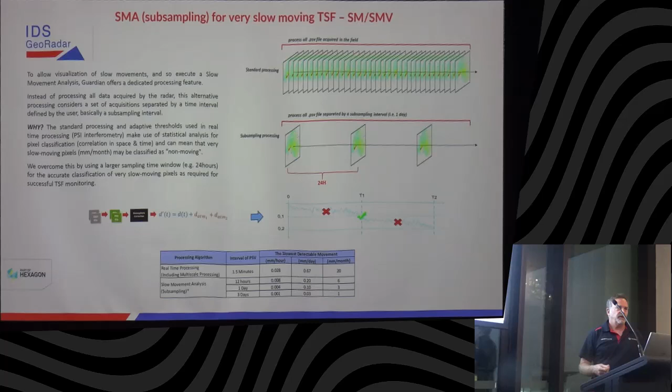The amount - I can't give you an answer as to what is the best subsampling time period to use, because it depends on the magnitude of displacement that you're hoping to detect. You've got to have a little bit of background knowledge about what you think may be happening on that slope.

Once again, I'm not going to go into it because you don't have the time, but our processing uses adaptive thresholds, and we also use a PSI, stands for persistent scatterer interferometry, similar to INSAR once again. So we actually use PSI interferometry, and we use statistical analysis to classify our moving and non-moving pixels.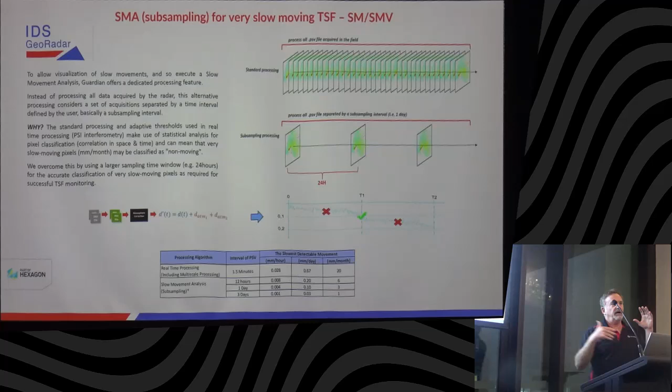And it's all based on correlation in space and time. So if there's an area of a high wall, for example, that's moving, the algorithm assumes that if it's real movement, if it's moving now, it's going to be moving in an hour's time, tomorrow, and the next week. That's correlation in time. Correlation in space refers to, if there's an area of the high wall that's moving, the same area is going to be moving as time progresses. It's not going to all of a sudden be moving over here, and then over here and down here - because if it is doing that, it's most likely due to some kind of atmospheric disturbance.

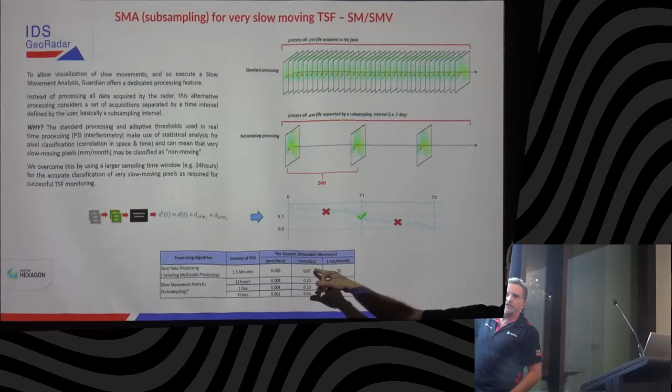So, having all that in the back of your mind, what we're essentially doing with this slow moving or subsampling process is reducing the slowest detectable movement that the radar is able to detect. If we get a scan every 1.5 minutes, then we're roughly going to be able to detect 0.67 of a mil per day. And if we subsample once every 24 hours, that's dropping off.

Now, this is not just a standard calculation because it takes into account multi-scaling as well. So it's not just multiplying a particular amount of deformation by a particular amount of scans per hour to come up with that - there's also multi-scaling happening as well. But to cut a long story short, that's what we're doing: we're minimising that slowest detectable movement, or minimum measurable velocity.

In radar world, everyone talks about phase ambiguity and maximum measurable velocity. That's important as well, but this is the opposite - we're changing that minimum MMV there.

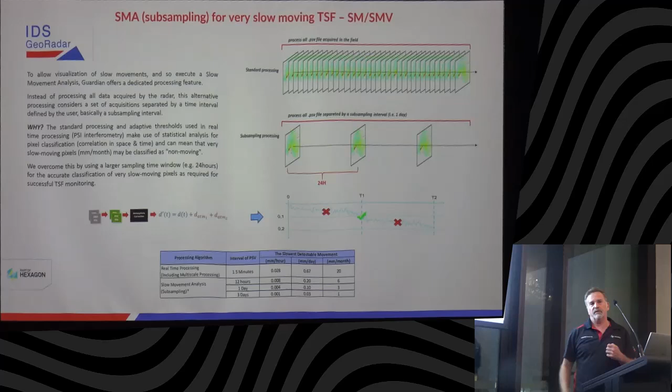So what it's doing, essentially over time, all these phase residuals that we get just add up and accumulate these little 0.1 of a mil or even less movements. They're phase residuals from atmospherics and other things, and that all adds up over time to basically swamp out some of this slow movement. Because that's pretty much what we're doing. It's very simple there.

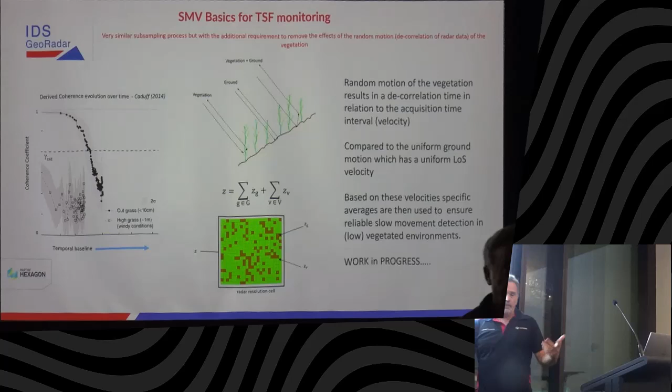Radar doesn't just pick up one measurement from within that cell. It does a very complex vector addition and adds up all the different little bits of backscattered radiation that it's getting from that pixel. In the case of a vegetated slope, it's equal to the sum of the backscattered radiation from the ground plus the sum of the backscattered radiation from the vegetation. So it all goes into one.

Up above there you'll see what I mean. So there's some energy reflecting off the ground, there's some reflecting off the vegetation. That's essentially, very basically, what it looks like there.

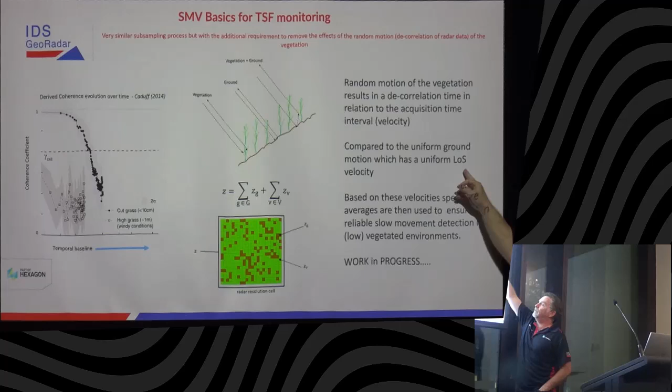I'm not going to go into it, but it looks at the decorrelation time in relation to the actual interval, the scan interval, and it comes up with a velocity. Then it compares that to the uniform velocity on the radar line of sight that it gets from the ground. So it compares the two velocities, and it averages them out. All being well, it makes its best attempt at removing the effects of the vegetation. It's not perfect, it's a work in progress, but we get pretty good results with it.

Just a couple of pictures as an example. That's one of our synthetic aperture radars in Samarco, monitoring that tailings dam you see in the background. It's called a synthetic aperture radar because it doesn't actually have a dish - it synthesises a dish essentially by the length of that linear scanner there. So the length of the scanner synthesises the size of a parabolic dish, pretty much, very basically.

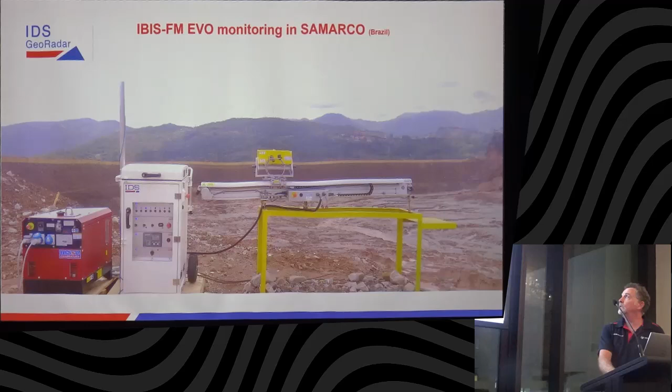Data correlation - I just want to talk about how we can use data from different instruments and how it makes the data a lot more valuable when we can correlate the two data sets. And if they show the same thing, then it's a good thing.

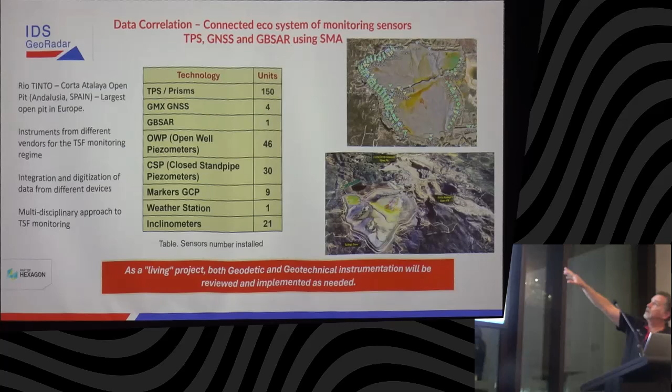So this particular tailings dam here - I can't actually pronounce it properly, so forgive me - Corta Atalaya. If anyone can speak Portuguese or Spanish, feel free. But we'll see that in this particular tailings dam here, they've got 150 prisms, 4 GNSS stations, 1 GBSAR radar, they've got piezos, open piezos, standpipe piezos, inclinometers, etc. So they've got all these different instrument types there.

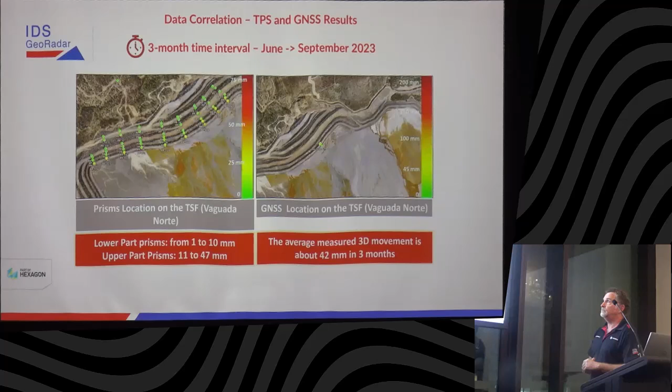The beauty of being able to bring all this data into the one platform, like Geomonitoring Hub for example, or Navstar, or whatever your product is, is the ability to actually compare the data from different instruments - it's really, really powerful. So we can see there that the prisms on the TSF wall are basically showing essentially exactly the same amount of movement as the GNSS station as well. So it gives us confidence in the data.

Same thing with radar data. If you don't understand what you're looking at here, that's just an example of some radar data with displacement on the left over here and amplitude on the right.

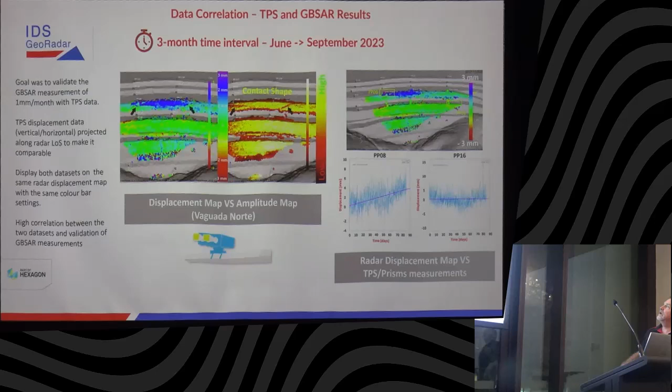We can see there that we've also pulled the prisms - so we've pulled these 2 prisms here into Guardian. To make the data comparable, we've had to project the prism information on the radar line of sight, because prism, as you know, isn't just measuring displacement - we've got vertical and horizontal components, things like that. So if we pull the prisms into Guardian, stick them in the right X, Y, Z, and project them on the horizontal line of sight towards the radar, we can make the prism data comparable to radar data.

We can see there as well high correlation between what we're seeing with the radar - the purple lines - and what we're seeing with the prism data as well. So we're able to bring different data sets into the one platform, correlate what they're saying, and straight away you've got almost 100% confidence that it's highly accurate data, or it's essentially doing what it's telling you it's doing.

Oh, sorry, I didn't go through the animation.

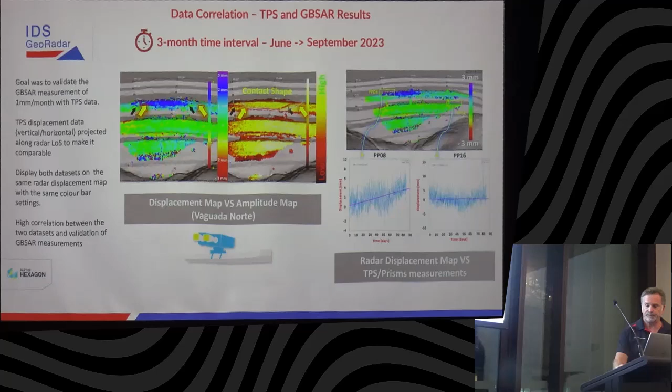So just as a bit of a summary, pretty much you can read that, but the data's been confirmed with GBSAR radar data and also prism data. We can also see there's a little discontinuity appearing at the top there in that blue area as well. Comparable data.

It's a really good thing. Myself and Christian up the back, we did some really cool stuff at a mine in Queensland. We ran a subsampling project that went over about 2 years worth of data, and we actually identified a movement on the north wall of this mine site that they did not even know was happening. They would not have known it was happening when looking at real-time data because it's too slow—it just gets swamped out by all the system noise and phase residuals and things like that. Not only that, but we could also align it almost exactly with what their prisms were displaying. So it was really powerful data. Only possible with subsampling.

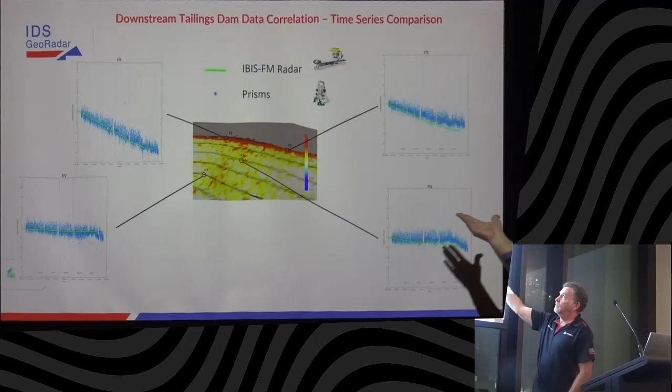Just another case study, it's pretty much the same. We're comparing prisms and some radar data. We can see here once again radar data on the left. We've pulled in some prisms, put them in the right location on the DTM. We've interpolated it, projected the prism data on the radar line of sight to make it meaningful or comparable. Once again we're able to see almost exactly the same behaviour with prisms and radar data. So that's really cool stuff.

Any questions? No? Two more slides, I'll put you out of your misery shortly.

Mapping and modelling and spatial validation and things like that. So we have partnerships with other third-party companies, in this particular case Rocscience, and we are able to use, with some really good results, all the different software packages that Rocscience has. On the left there, that's their 3D limit equilibrium software called Slide 3D. They've put in their failure surfaces there, and they're able to basically work out factor of safety wise what could potentially happen there in that wedge, that's occurring.

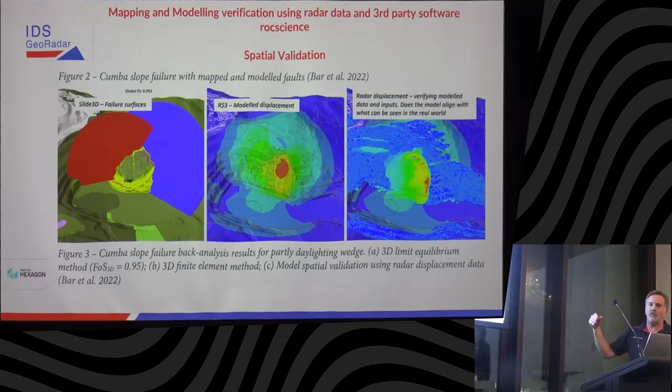Finite element analysis, the next one, RS3. They're able to model the displacement in a particular area by, like any finite analysis, entering parameters and seeing what the results are. But what's really good with radar data is, especially with Rocscience, we can import different data sets both ways, from one software package to the other. So we're able to import our radar data into the Rocscience product and basically see exactly what's happening, and essentially we're able to verify their modelling. Does their model—the inputs, strengths, strains and everything else they're putting in their FEA software—align with reality? In this particular case, yes it does. So it's very powerful when you get down to some really deep level, really cool analysis by using data across these different software packages.

Some of you guys probably do that already, no doubt.

So yeah, that's about it. Just to summarise, the type of monitoring you're going to introduce in a TSF facility is going to depend on your risk analysis or your risk aversion or whatever. Obviously, from low risk up to high risk will change what kind of instruments you're going to use, radar data being one of those things. And what's really cool with radar data is, well, with the IDS data, you can do that subsampling and detect extremely slow, low-level displacement rates that you probably cannot detect with any other monitoring technology that I'm aware of.